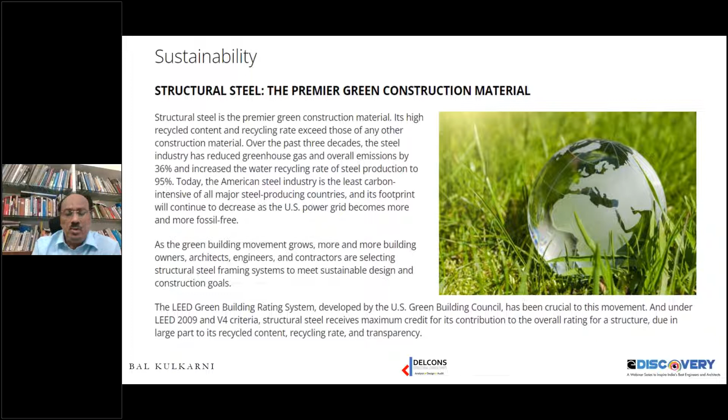We can say that the carbon footprint of all major steel producing countries will continue to improve. Steel, because of its scalability, its sustainability properties, and its properties of having both tension and compression effects together, has helped structural engineers and architects in devising new geometries for structures or new concepts.

Here are some of the material attributes: recycled content in steel is as much as 93%, and 98% of all steel manufactured worldwide is recycled. Steel has a very high strength to weight ratio, a very low carbon footprint, and is mainly being used nowadays for

commercial structures, etc. Its main potential is that it has reuse and scrap value. We can build a building, and after it has lived its life, we can still get at least around 20 to 30% of its cost as scrap value. That makes it a far superior building material nowadays.

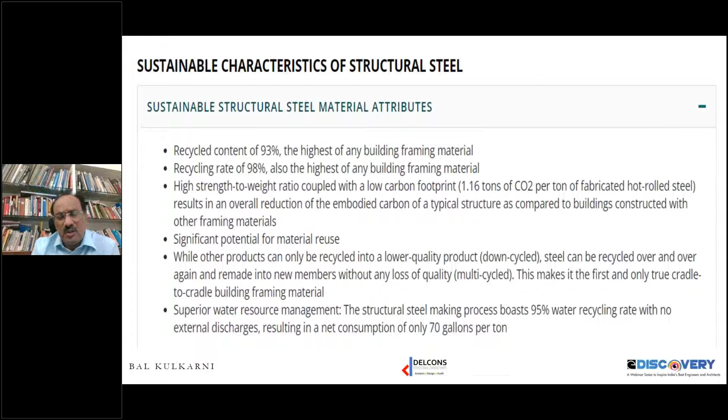The steel industry has changed - up to 95% of water is being recycled. The use of water has also reduced drastically. You can see the changes since 1980 that have happened in the steel manufacturing process - a drastic change has happened, you can say it has really turned around.

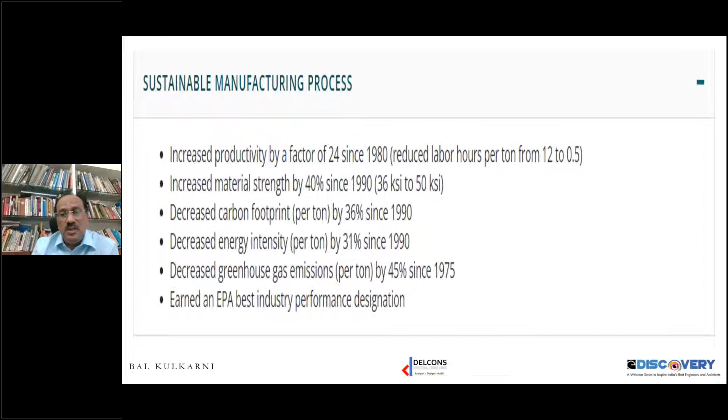You can see decreased greenhouse gas emissions are down by nearly 45%, decreased carbon footprint by 36%, and energy intensity per ton reduced by nearly 31%. That has made production of steel a very rewarding manufacturing process.

Again, steel's biggest application is that it doesn't have to be prepared or cast on site. You don't have to worry about its qualities. It's available in plates, in different rolled beams, whatever sizes you want. It can be fabricated anywhere and transported to your locations. When manufactured in the workshop, you can stick to stringent tolerances, have erection schedules, etc. All those things are very important.

Wastage is a common factor - on other sites wastage is as much as 3 to 5%. Here there is hardly any wastage, and any wastage that is generated is again recyclable. We have centralized or offsite fabrication, which minimizes employee travel.

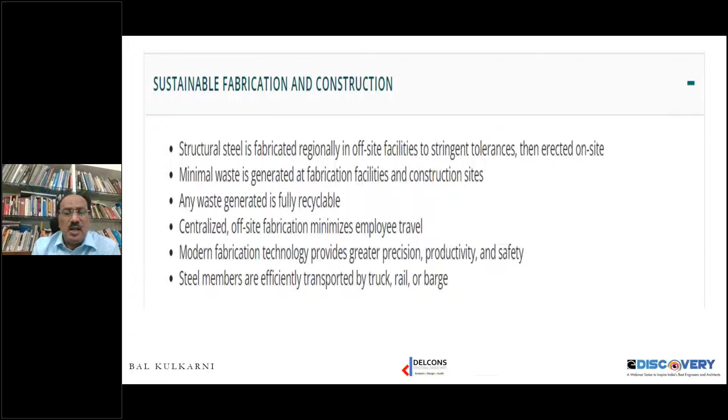Travel has today become a big issue with sustainability concerns. We have lots of fabrication technologies giving greater precision, greater productivity, and safety. Manufacturing on site had lots of safety issues, and steel can easily be transported by truck, rail, or barges or ships, because there is very little chance of it being damaged during transit, unless we are using very thin sections, etc.

The main issue nowadays with steel buildings is that they can easily be deconstructed, and generally they have lots of scrap value. In case our members are designed properly, we can literally deconstruct them and use them elsewhere, so it's not just scrap value, but we can use it to its full value also.

The maintenance required is also minimum. Steel frame buildings nowadays are highly durable, with a very long lifespan. They can be very quickly modified or expanded, and the construction sequences are very flexible. You could do the third floor on one side and the first floor on another, maybe skip two floors, do the upper floors, then come back and do the lower floors.

The net sections for structural steel are much lower compared to concrete. The sizes are a lot lower, so we have large areas, large windows, and more open spaces. All these glass buildings that we see are essentially possible mainly because of structural steel.

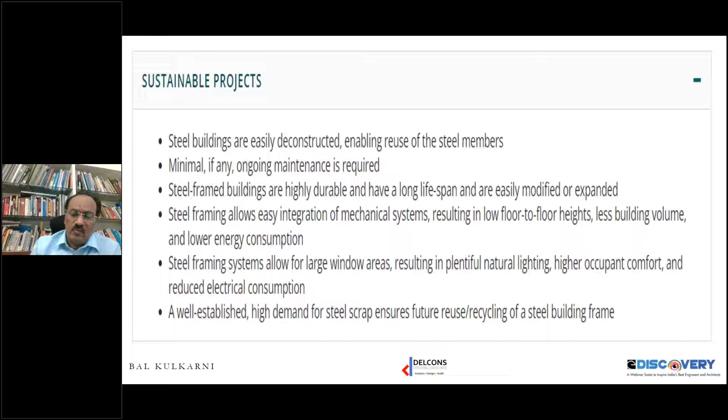We will go on to some case studies. There are thousands of structures all over the world which have great value, but this is something I like among so many structures. There are many different types of structures which could be featured, but we are restricted on time, so I've tried to pick out from some things. The choice is very difficult.

I have taken some structures, and the first especially is a very minimalistic structure. It will not impose itself upon nature or its environment, but involves a lot of design and thought process, though it looks very simple. The next structure is very famous, built as a landmark or iconic structure, where during the presentation we could look at its construction and design characteristics and how out-of-the-box thinking was necessary. Then maybe another industrial structure where the owners were very particular that everything should be sustainable and green, but still how they were able to generate a different type of structure without restrictions on design, adaptability, shapes, and sizes.

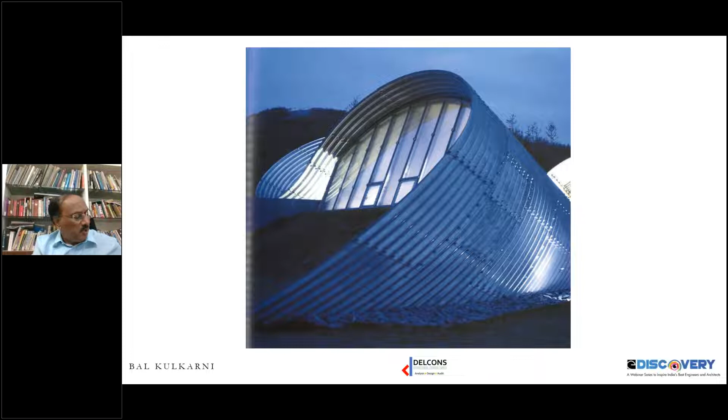The architect has used corrugated MS sheets or iron sheets, which were previously used a lot by Australian architect Glenn Murcutt. But again, these sheets are not supported by any means. They are just joined together and bolted together in a particular form. This form is a sort of spiral, and the spiral is supported in a variety of ways. It's a series of beams held onto steel tubes, one pair for each element in the spiral.

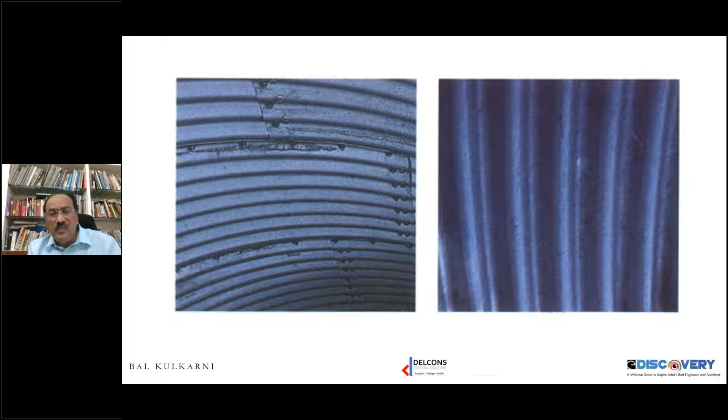Occasionally, the shape is maintained by an array of 7 or 8 horizontal struts. The base of one spiral is supported by a cantilever beam. I will just show you this. Here you can see we just have some poles or columns, then some horizontal beams.

Those horizontal beams just help in maintaining the shape of the structure, and sometimes help the structure move around it. Sometimes you'll feel that for this size and shape of structure and this weight, the sizes are a little heavier. But again, these sizes are a consequence of Japan's earthquake-related building code.

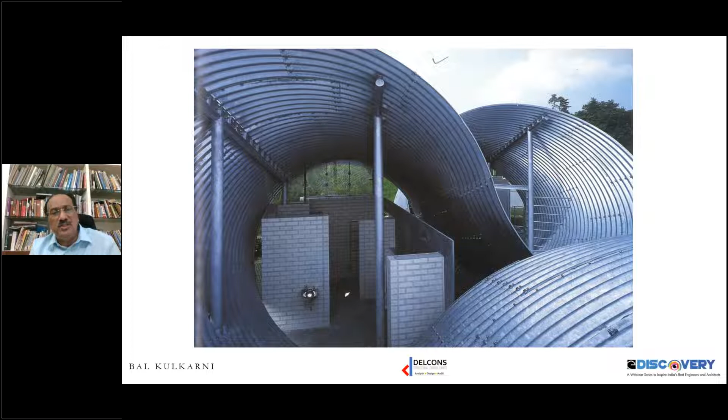The pre-curved sheets are just bolted together side by side and also end to end. So in between the sheets, you see these spaces being generated, and these spaces are what are being used.

You see here that this building, though visually it's a little extreme, involved very little structural input. Hardly there. We just see some columns and beams, and those are just necessary. But no special significance was necessary because the corrugated sheets are merely functioning as providing local stiffness in parts.

The supporting structure would look odd. It has no design value as such, but it is just a simple metal version of a familiar post and beam. The sheets are bolted together as if used everywhere as an industrial material.

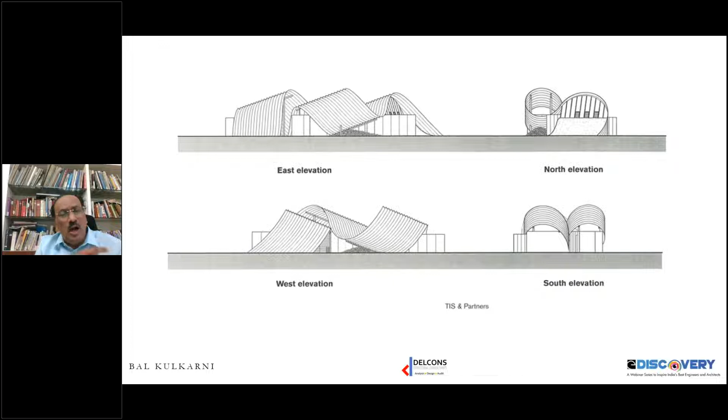But the fun part is how was this derived? Here you can see we have a column and a typical beam, and this is what I'm saying - the sizes of the columns and beams would seem to be much larger than we would have expected for such a thin and lightweight structure.

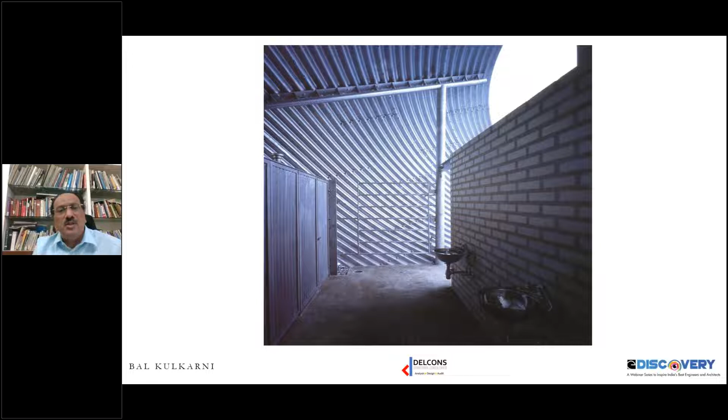But again, that is mostly due to Japan's building codes. This is a study of how it all started - how we are going to roll those corrugated sheets and prepare that sort of structure, where though the use is linear, the structure just curves around everything.

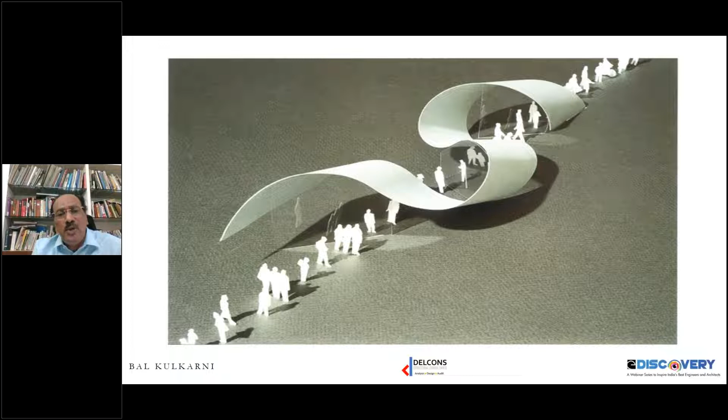Though this structure looks very simple, generating this form - something that is just propped up by a column or a beam - was very difficult. This series shows the studies that were undertaken while the design was being formulated.

This design is about random ribbon arrays, and how those ribbon arrays would help in generating the necessary stiffness for the sheets. The sheets by itself have strength only from the corrugations, but the corrugations and the curvature both add to the strength of the structure. So you see the various geometric complexities that actually had to be tackled while doing this sort of structure, and these are some of the experiments that were done.

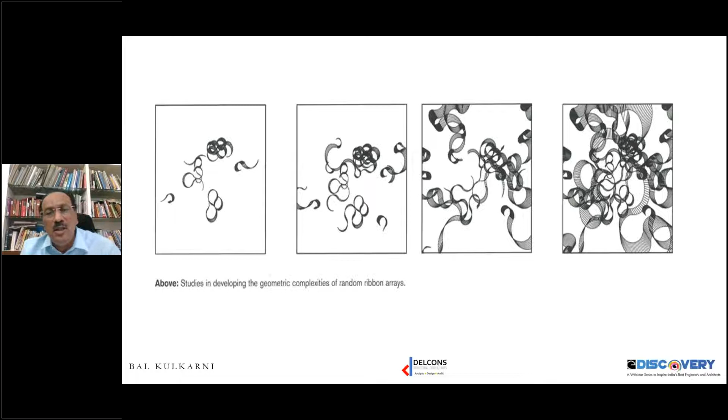You can see a ribbon being passed over three cylinders, and the generated volumes in between those cylinders was then quantified and put aside. You can see one here was the lounge. The second part is the men's toilet area, and the third is the women's toilet.

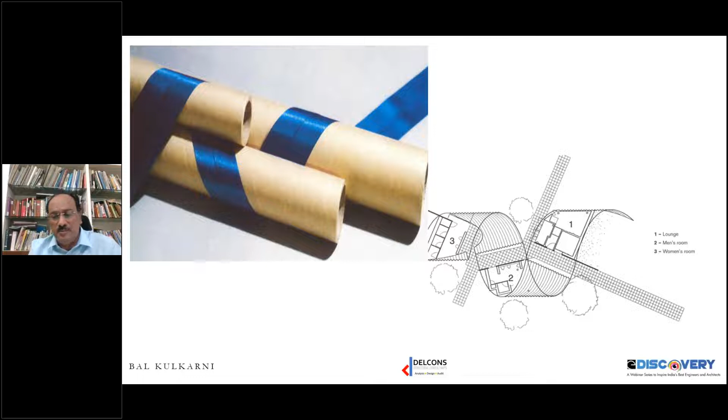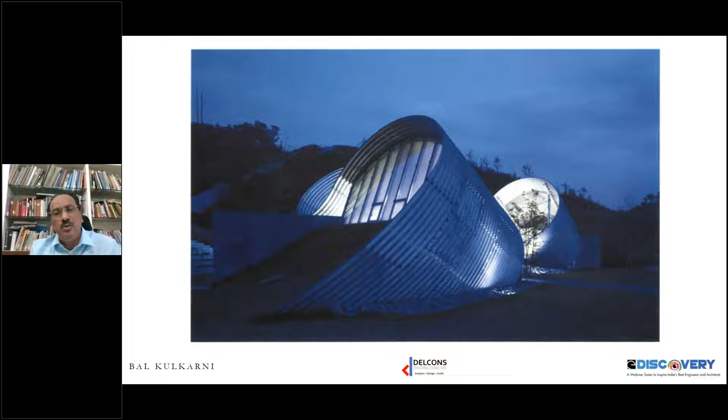So this is actually how it looks. Because of these continuous changes in geometry, this part of the structure was put up on a sort of earth berm, so that the level differences could be negotiated during the structure.

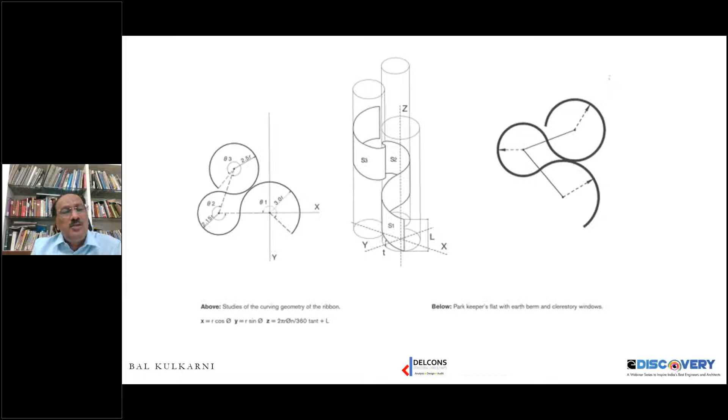Again, a little more study of how this whole thing was generated. If we look at it in plan it looks very simple, but that is not the case. You can see the curving geometries of the ribbon involved. But it is not just in plan, it is curving in plan and elevation, and also in the third dimension.

So if you try and put this plan, the first sketch on the left side, onto a vertical elevation, you can see that this plan itself is moving all around, and also going up and down. So if we take a section through, passing through all the centers at different levels, we come back to that same plan, and those areas are what are effectively being used.

So I thought this was a fantastic structure, in the sense that though it looks very simple, its construction, in fact generating a geometry for it, was really very difficult, and the studies that went into making this into a stable and very simple structure were really very impressive.

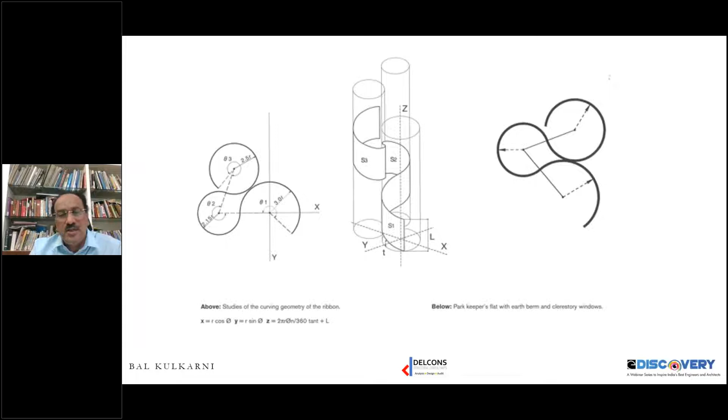So again, if you see the effect on the surroundings, it is a park keeper's home. So the whole park, I mean, there is no chance that the park is anyway overshaded by this structure. That is why I thought this is among the very good structures.

Next, I will go on to a very famous structure. This is the London Eye, located on the south bank of the Thames, opposite the Houses of Parliament, and it has become nowadays the world's biggest observation wheel. It was actually proposed to be put up during the new millennium.

It was conceived by the architectural practice of Marks Barfield in a competition run in the early 90s. Actually, nobody won the competition, but the architects pressed on, and eventually in the early months of 2000, it was formulated.

That is why you see so many people from different companies being involved there. And yes, it was a group effort, you can say, but something really spectacular was put up.

Spectacular not just in terms of architectural geometry, but structurally this was a huge challenge because, unlike most Ferris wheels we design, which normally have supports on both sides - like a bicycle wheel, a motorcycle wheel, or any wheel - either we have two wheels joined together, or if we have one wheel, it is always supported from two sides.

But in this case, the London Eye is supported only on one side. The whole wheel is around 135 meters in diameter, and the whole load is carried by a giant bearing which cantilevers from a pair of inclined props anchored into the ground. Here you can see them - the two inclined props are only on one side, and there is a small cantilever which drives the whole wheel.

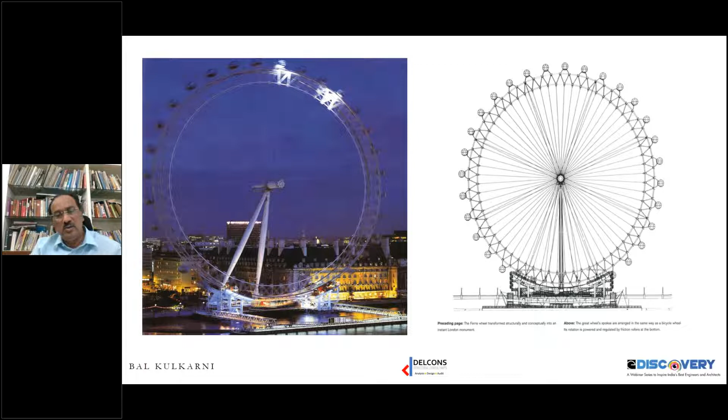This whole wheel is rotated by a drive unit, based at the base of the structure. Here we have a drawing of the whole structure, and a section. Again, being supported from one side, it had to be anchored by two big cables.

This whole concept was developed by an engineer, Jane Wernick, who was with the world's largest consulting engineering group, called Ove Arup and Partners. They worked on infrastructure, environmental impact, and these are some very early capsule ideas of the design. The whole concept had been designed, but the structural design had not yet been carried out.

And they were looking for contractors or somebody to sponsor the whole project. Later on, British Airways got involved and decided they would help in building this, and the whole process started. When these two major contracts were established, the engineering design began, with Allott and Lomax.

The engineering issues were actually very complicated because there was no precedent for this sort of design, since the shape itself was unique and the supporting arrangement itself was unique. The conventional codes were of no use in trying to design this sort of a structure.

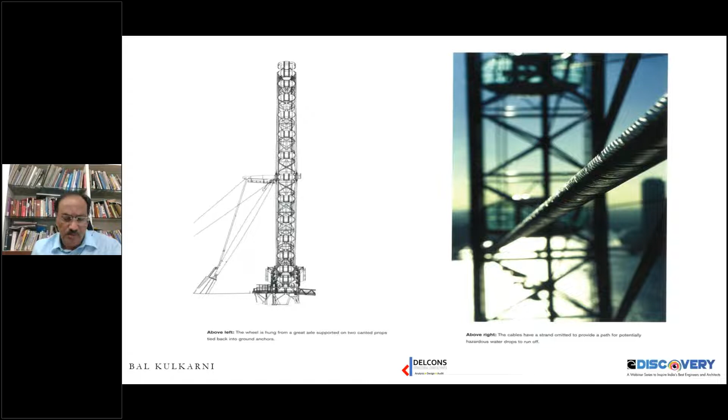There's also a chance that maybe not everything was thought of, since the codes are not applicable, so we couldn't simply say that all the conditions in the codes are satisfied to get something stable. But this whole designing process was very transparent and collaborative, and it involved a lot of testing and intensive monitoring built into it.

There were several ideas about the structure. This was one of the ideas about how the whole thing could be put up. The Arup engineer Jane Wernick prepared sketches of how the whole thing could be set up.

You can see in the left side sketches where first the foundation would be done, then the inclined poles would be put up. Once those inclined poles were up, a quadrant of the wheel would be put up, then shifted, then the next quadrant would be added, and so on, until the whole thing could be put up vertically.

But after lots of deliberations and designs, it was realized that building it up in bits and pieces was not possible, because of the whole geometry involved and the difficulty in estimating wind loads, etc. So it was decided that the whole thing would be prefabricated on the ground itself and pushed up.

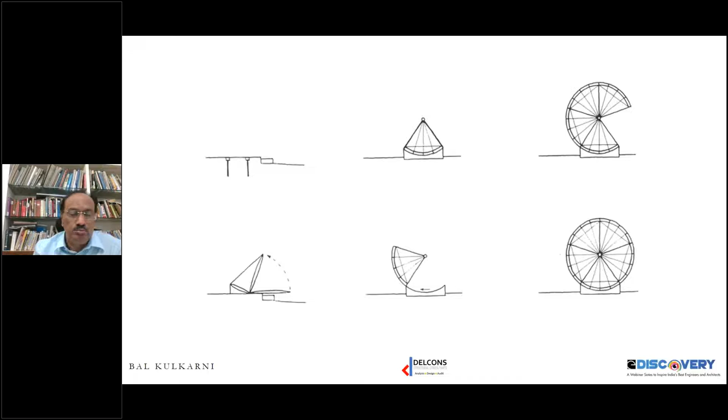So you can see the final design of this Ferris wheel, or the rim. The rim itself is a triangular open lattice sort of truss in the form of a circle, and being a circle with a lattice truss, that gave it the most structurally efficient solution. It provided required strength, lots of torsional resistance, and a huge potential for load redistribution.

This rim is attached to the hub of the main wheel by radial spokes. All these spokes are cables, and they are pre-stressed. There are about 64 cables, and all of them are in some sort of tension, whatever the rotation of the rim. This is not like normal bicycle spokes where some are in tension and some in compression. In this case, all 64 cables are always in tension, and because of this, the rim is always under constant uniform compression.

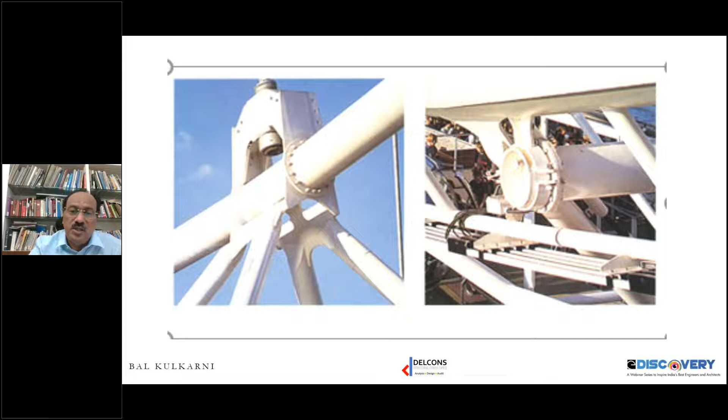These are fixed to the outer rims. In this you see that long round cylinder—let me show you one more photograph. Here you can see the rim has these mass tuned dampers attached to every cable location, so to say, and these were necessary to keep the whole thing in place when in action and also when not in action. Here you can see in this photograph the whole thing was assembled on the ground on the river.

As it was assembled, nearly two-thirds of the Thames was occupied by this whole thing. And these dampers could be tuned, and they were tuned as the whole wheel was being erected.

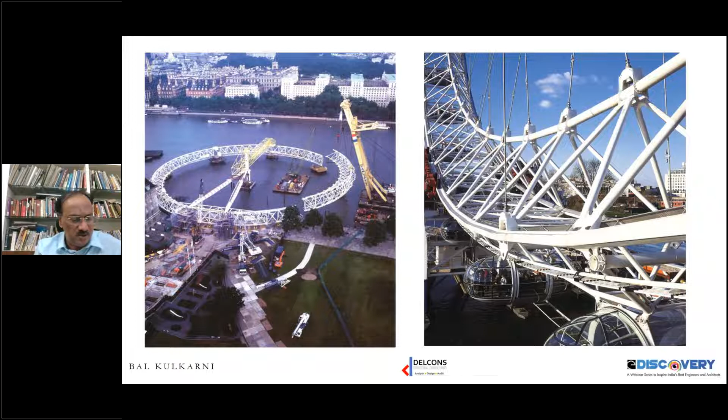Normally, in all other Ferris wheels, the passengers are suspended, or the seating for the passengers is suspended. But this was not the case. You can say the seating or the cabin was aerodynamically designed, and they offered lots of comfort. They would not sway from side to side, but would just move round and round, and that is why the design of the

capsule looks to be very heavy. But this had to be, so to say, aerodynamically stabilized, and that is why this sort of design was necessary.

Though they are a little circular in cross section, so that they can rotate within the two mounting rings attached to the outer rim. And they are driven by individual motors. Those motors are located in a void under the capsule floors, and these motors are regulated by radio signals.

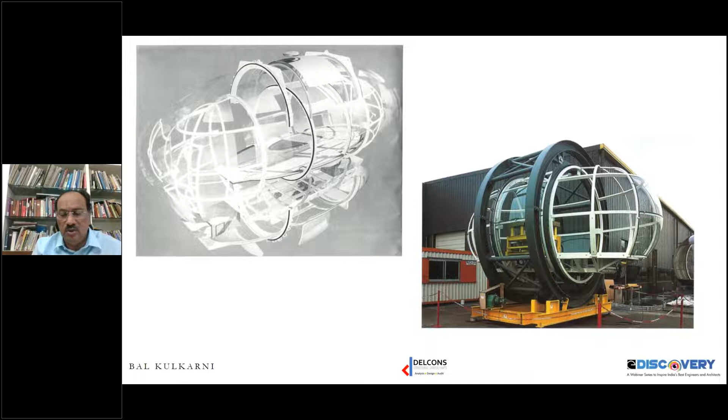So you can see a very intricate design, one of its kind, was generated. These are some computer model photographs. You can see a full-size prototype of the capsule showing the fixed ring, and this was necessary to give it—this shows you the deflected shapes of the structure. You can look at it; it is literally deflecting in any and every way that is possible.

And these deformations had to be taken care of. These deformations were very dynamic, because they would change depending upon the position of the wheel. In the third picture, you see the straight position of the wheel. But in the remaining three diagrams, we see that the whole thing is twisting, not only in a vertical axis but differently. This is like the mode shapes which happen for a building during an earthquake.

So the response of this structure was so dynamic that all the mass tuned dampers provided had to be really controlled, and they were necessary. Otherwise, one would wonder what the necessity of having 64 tuned dampers is. But these dampers were really necessary, and this is what put the whole thing in place, giving relief to the passengers sitting in the wheel. And yes, they add to safety also, but otherwise, with these sort of deflections, the ride...

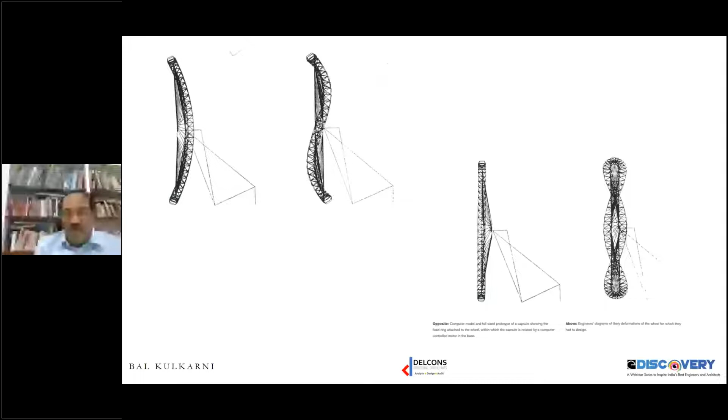So that was about the London Eye. We will go on to another—this is really, we can say, a conventional project compared to the two previous projects that we saw.

This is by Nicholas Grimshaw, the RAC Regional Control Center. This is a sort of car park, which is part of the whole building, and the building is totally glazed—no walls as such.

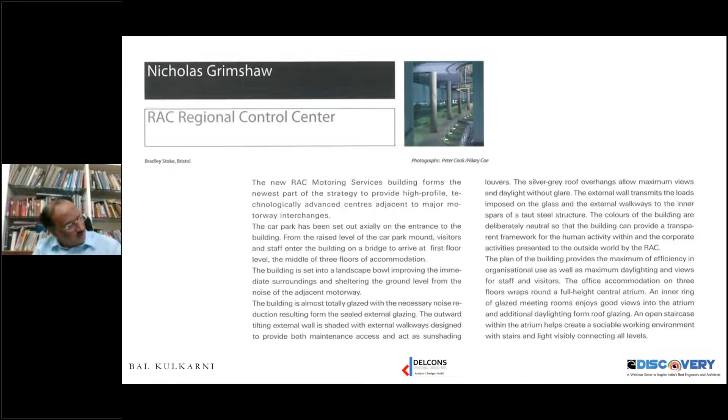And this is an image of the building. The outward tilting external wall is shaded by the external walkways. The walkways are also used as maintenance access and act as sunshades. You can see the silver gray roof overhangs, allowing maximum views and maximum daylight without glare. The external wall transmits the load imposed on the glass and the external walkways to the inner spars of

the steel structure. This whole steel structure is, again, partly cable-stayed and partly steel. The colors of the building are deliberately kept neutral, so that the building can provide a transparent framework for human activity.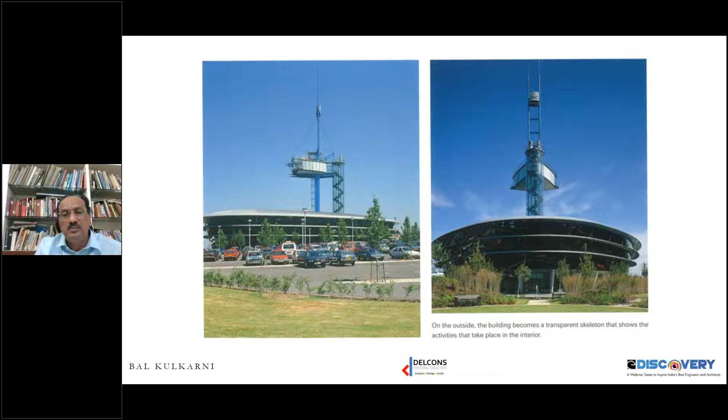Here again you see what we require for structural steel structures, as against conventional RCC structures or any other wooden type of structures, would be that we require lots of bracings.

We require bracings in the horizontal direction. We require bracings in the vertical direction. A very efficient use of these bracing systems has been introduced as a design feature itself, sometimes in part of tension only, or cable structures, or sometimes as metallic structural steel tubes only.

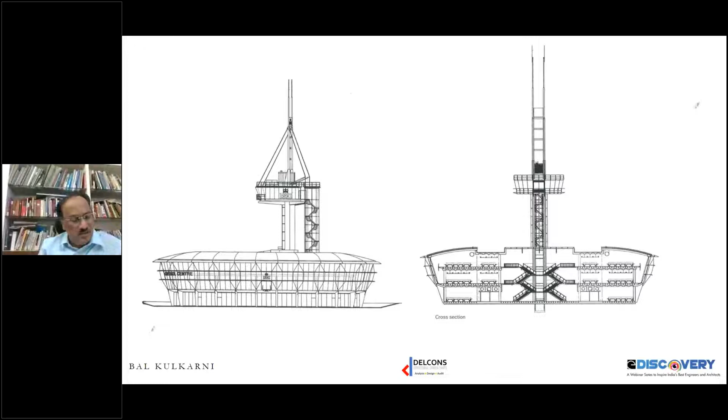The central core, which goes up again, has big cantilevers on both sides, and that is suspended from the pylon that is going up there.

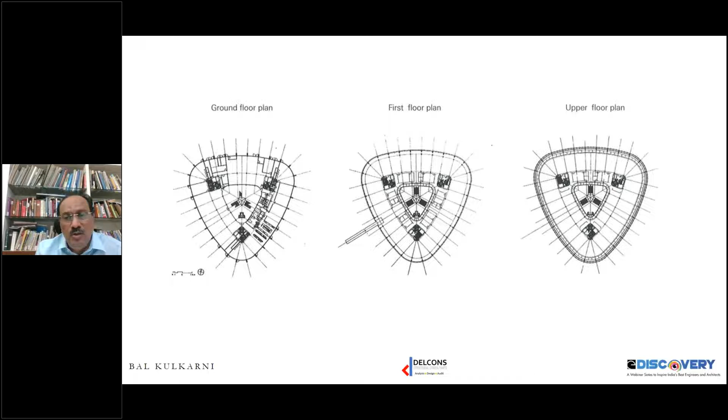If you look at it, the plan is relatively very simple. At various levels it changes, but the external part remains the same. The walkways are projecting out of the window, which help in circulation in the whole building. So we have a central core and everything built around it.

Everything is visible here. So there is no attempt made anywhere, but still we find that it gives you such a nice structure. And these walkways form a sort of vertical truss columns, and that is only trusses.

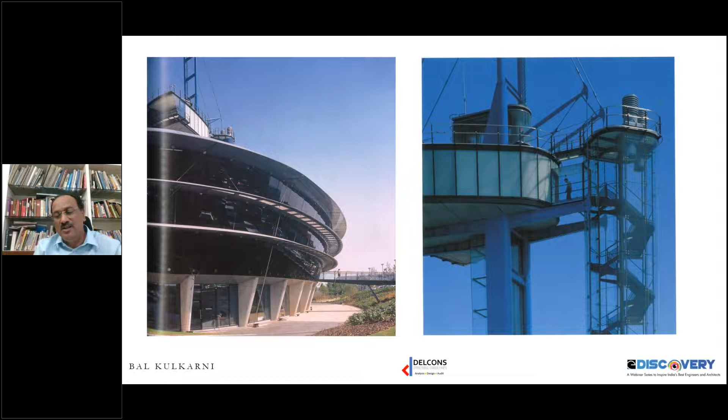Hello, hello, hello. Am I audible? Hello. Can you hear me, or is the connection lost? Yeah, Mr. Kulkarni, you are audible. Okay, shall we go on now? Yeah, sure. I got a message saying the connection is lost, so I was worried. I think the net is a little poor from your side. That's why. Oh, acha, okay.

Though geometrically the shape is also very interesting, there is no attempt in any way to hide the constructional details or the cross sectionals or the shapes of the structure.

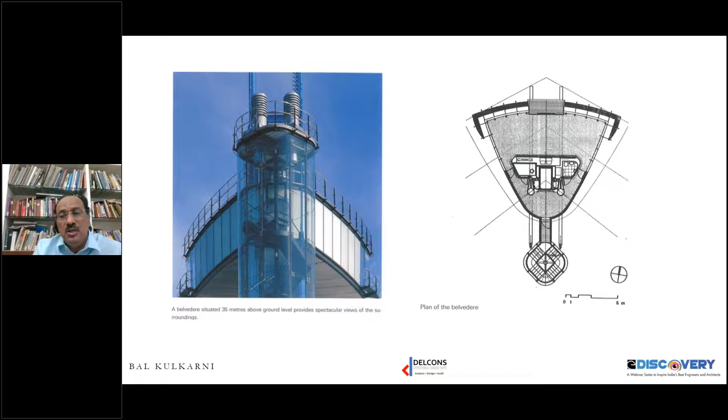Again, we can see the connections, especially the pylons originating, and the truss system that has been generated to support the glass facade, also done interestingly with the base and the formation of the pin and the shape of the stiffener plates and its joinery to the cable patterns.

Also very interesting. Here you can also see the shape of the glass and the railing. The railing takes a very interesting form in this case, and it has also been very nicely designed with those vertical mullions, etc. Overall you get that effect that it is just steel, steel, steel and steel.

And again, the people who are working there would get that effect, that all the time they get fantastic views of not only the outside but also of the inside. And as the sunlight changes, the glare, or the light inside the building keeps changing, so it's always very interesting.

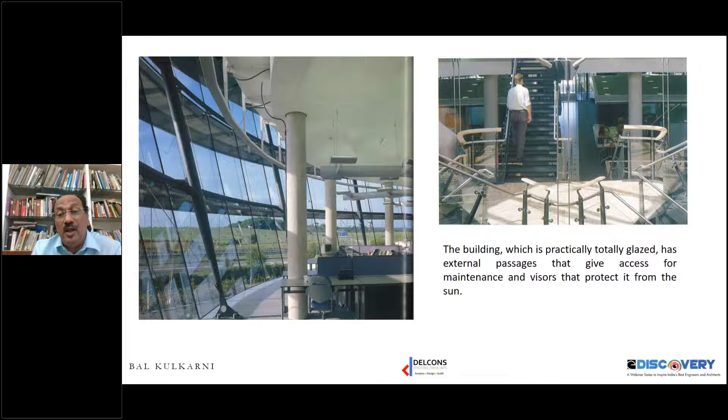Any person working there would find it so interesting that through the day they would have different views, and they would get that feeling that we are working in a different environment throughout the day, not a constant view all the time.

You can see the cantilevers, the cantilever brackets that are provided are also very elegantly done.

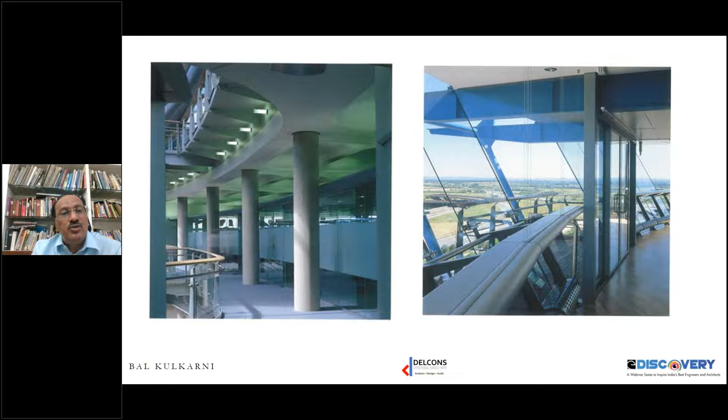So that was about this. We'll go on to another.

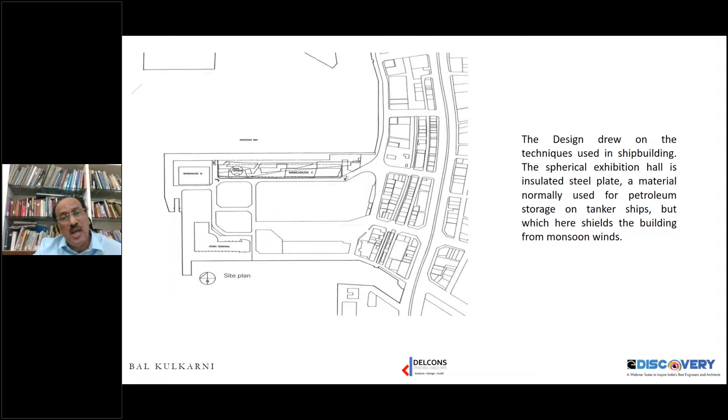With this in mind, the architects proposed a rooftop public garden space in addition to the 14-meter high two-level warehouse that was commissioned. Warehouse C is 200 meters long, 25 meters wide, and an average of 22 meters high. These dimensions are literally comparable to a super tanker.

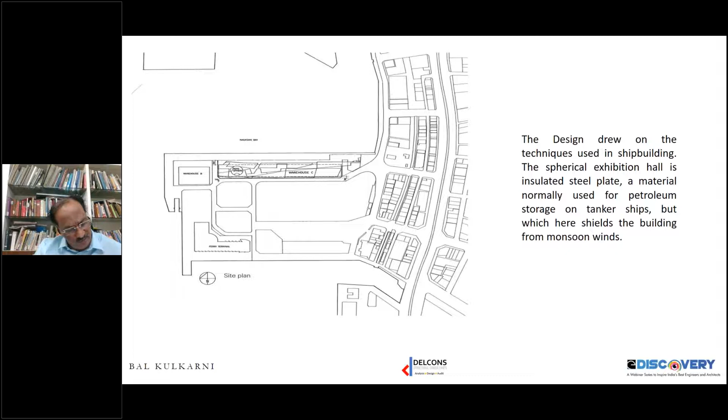This whole thing is organized in 3 different parts: a 2-level private warehouse on the bottom, a public garden on its roof, and a 20-meter diameter spherical exhibition hall. The round shape you see is the visibility of the whole structure, the sphere.

The roof shape is a sort of elevated ground floor plane, and it provides a public link between the ferry and the retail spaces on the new wharf, or some roads that lead to the center of the city.

This is not entirely steel, it's a sort of composite construction. The warehouse is concrete - the south elevation walls, systems, and approximately half of the roof enclosure is fabric on the north side. The spherical exhibition hall is insulated steel, about 20 meters in diameter, actually used as a petroleum storage tank for the huge tanker ships that come into Nagasaki.

This steel actually shields the whole building from the prevailing wind storms that occur normally in the monsoon. The steel structure, the plate wall, the roof systems, and the steel sphere are actually manufactured by shipbuilders across the harbor and brought to site by barge and assembled together here.

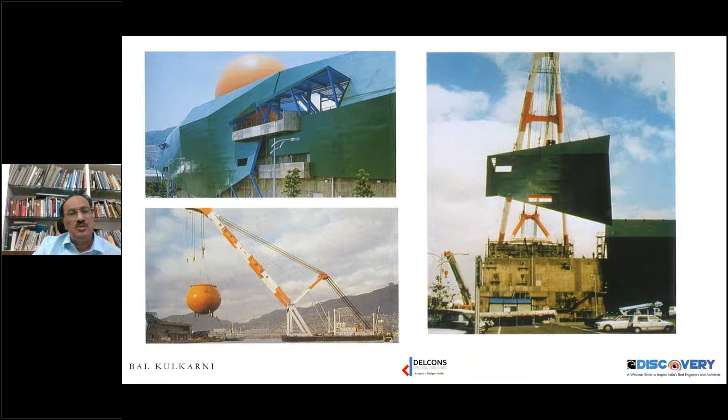The roof and walls of this whole thing are a series of non-parallel frames. I'll just show you the roof. Here are some photographs during the construction stage where the whole steel sphere was fabricated elsewhere, brought to the site, and effectively lowered in place by the steel barges itself. So this has not been fabricated by standard civil engineering fabricators, but the whole thing has been constructed essentially by shipbuilders.

Again we see a contrasting style here for construction of the warehouse, where on one side we have a regular rolled beam, or a three-plated beam system, a rafter in place, and half of it connected to that same structure is an open web, a truss sort of system. But this interplay and the changing spans - there are no finite spans for the whole structure.

It is partly covered, partly open. You can see three trusses of one span, then immediately we go on to another span. The same detail is repeated, but as we go on, the roof is at different levels. You can see all the trusses, and the roof is again a series - interestingly, here we see that the roof is also not in one level. The slopes are different and they keep changing.

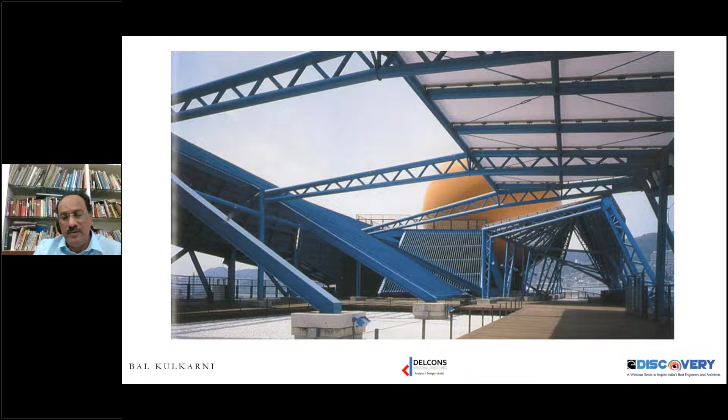And the steel and the planar systems, it's a big sort of paradox - it's a difference between the plane geometry and the fabric roof.

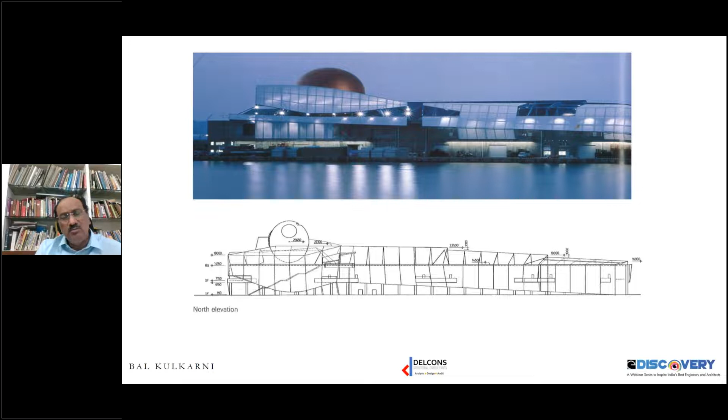Some of the shipbuilders were saying that the whole thing is extremely conventional. But if you look at the structure, we see that it's hardly conventional. It's very extremely unconventional.

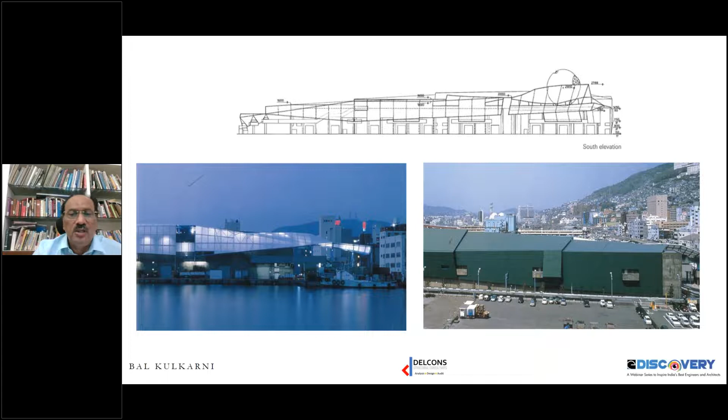Here you can see a typical section where the roof itself is cascading in and out, up and down, and every face of the roof or even of the wall is a sort of non-parallel frame. But inside, as I showed you, it is divided by or supported by different types of frames in the columns.

In plan, if you see the garden level plan, we see that at least the columns are in a grid at one time. But if you look at it at the ground level, we can see that the columns, though they are in grid, the supporting trusses for the roofs are off grid.

We would normally have connected a series of columns in a particular line with a truss, but here we find that alternate columns are, in some cases, connected directly in line, and in some cases they are connecting offline.

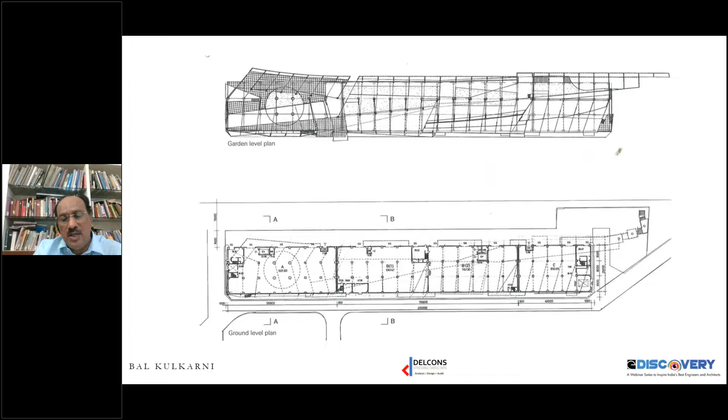Here again we see the different sorts of non-parallel frames that are generated by this non-sequential combining of the roof structural systems.

And then again we have this huge structural steel sphere which is mounted on these main 4 columns, in the area marked A. So this whole warehouse is divided into 4 parts: A, B, B1, B2, and C.

A is all oblique lines. B is again a series of parallel lines. B2 is again a series of just some very small inclinations and some very big inclinations. And C again has a different plane altogether.

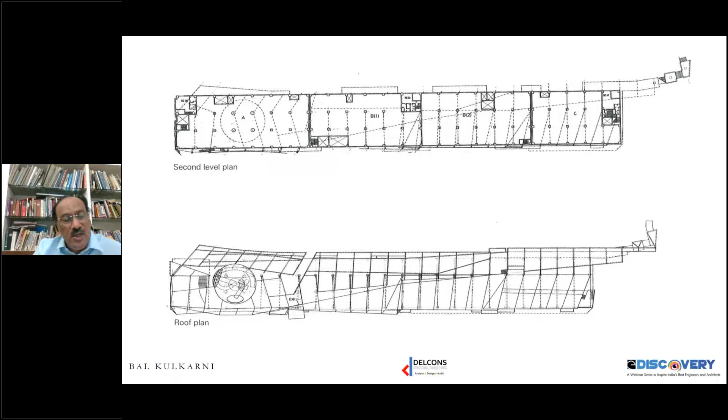Combining all this in one section has made this whole structure very interesting, and that is why I find it very profound. A warehouse could have been designed so simply by just taking 2 columns on one side and providing a different sort of roof, but to be able to play with this structure so much and generate all sorts of structural systems to support the roofs has made this whole thing very, very interesting, and that is why I find this an inspirational structure.